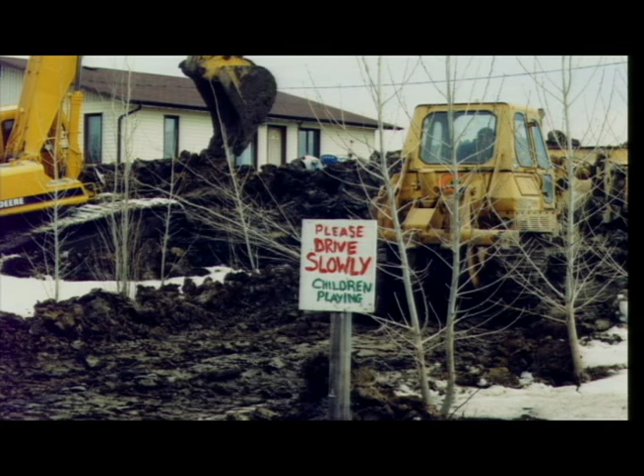So today I'm going to talk to you about the science of sandbags, specifically from an engineering perspective. Now, we've seen a lot of snow, and there's been a lot of reports recently about all the snow in southern Saskatchewan, western Manitoba, and certainly some further south, although not as much in the Red River Basin. When I see a picture like this, I have a very different perception than probably a lot of people do. People look at this and say, wow, it's a winter wonderland, good skiing, good winter activities. When I see this snowpack, though, I see what is going to turn to water in the spring. And that means this type of activity for me. This is a picture of some heavy equipment out building a clay dike, which is considered the gold standard for flood protection when you're looking at building dike structures for protecting homes, communities, and so on.

And so what you see here is basically, and I love this photo because of the sign, you see engineers out instructing contractors to build these structures to protect this home and what is a series of homes in a community here in Manitoba. Now, there are a lot of areas where we don't have access or ability to build these types of clay dike structures, so we have to turn to other forms of flood protection, and most notably the one in Manitoba that we certainly are aware of is sandbag dikes.

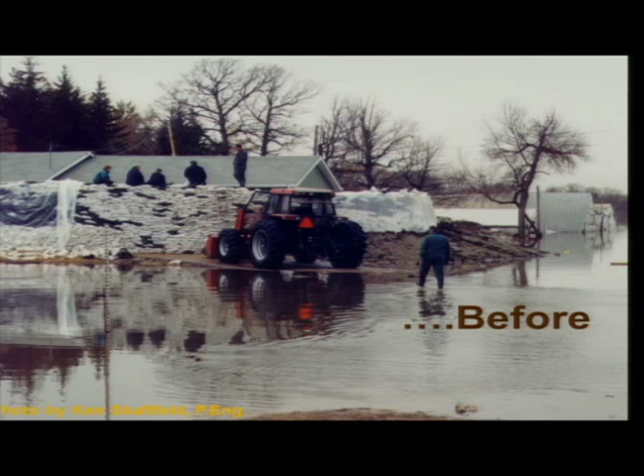This is a picture from 1997 of a house south of the perimeter where we're seeing here, and for those of you that are familiar with farm equipment will know, is about 10, 12 feet tall. We're looking at a 12-foot sandbag dike structure protecting this home. And we're very unique in Manitoba. This is very unusual to use sandbags to this height.

And when we did some study in my research group originally looking at this, what we discovered is sandbags are used for flood protection here in Manitoba, not based on a series of studies and tests and understanding of the mechanics of how these things perform, but based mostly on folklore, passed on through generations of people fighting floods over the centuries. And so as a result here, we can see this sandbag dike in 97, because that was the highest flood protection level we'd seen on the Red River up until that point since the construction of the floodway, was an extremely large sandbag dike.

And a lot of the engineers were looking at this and saying, well, wait a second here, is this thing safe? Obviously, we had to evacuate these homes. People couldn't live behind that structure. But there was a lot of uncertainty about whether it was appropriate to use the template for design for sandbag dikes that were typically 3-4 feet high, extrapolate that out to 12 feet in height. So right away, we saw the practice of engineering, an understanding of uncertainty of whether or not this was safe.

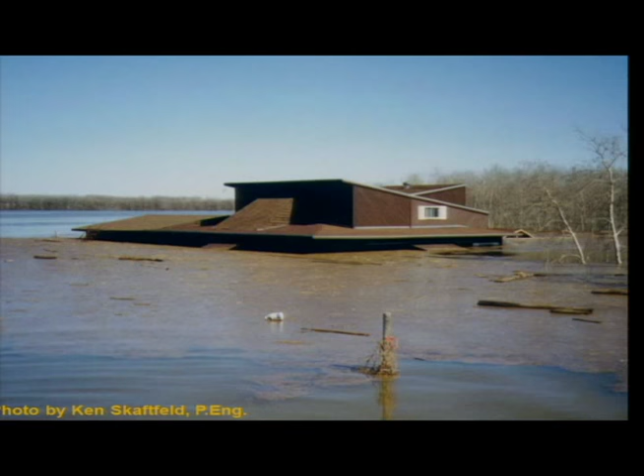We were very fortunate. We were able to save a lot of homes with sandbag dikes. But of course, that wasn't every single case. We had some successes such as this one. And we had some failures such as this one. And you can imagine the devastation and the emotional impact of having your home flooded to this degree. That's practically the entire main floor of that dwelling. So clearly there was a need to put some better science behind our understanding and look at other methods to protect homes during these types of flood conditions.

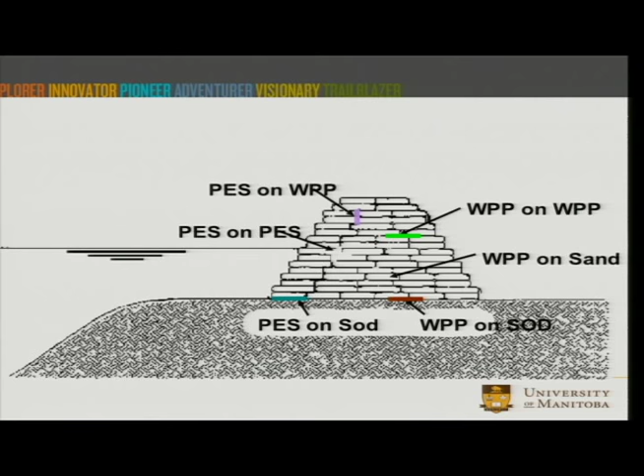Now I'm not going to go into the details of all these acronyms, but you can see here this is the standard template that's used. So when people are building a sandbag dike, this is the template that's given to them, and then some information about the height, the width, the top, and so on. But the key thing that I want to share with you is that a sandbag dike is basically a series of a whole bunch of blocks that have interfaces upon which they're sitting and have the ability to slip or slide, right? So the key thing is, when we look at how could this sandbag dike fail under hydraulic loading, the first thing we ask ourselves is, where might the slippage occur?

Is the weakest between bag to bag? There's the poly sheet that goes up this side. That's the piece of clear poly that you buy that you put into the sandbag dike to stop the water. There's the slippage on the sod itself. A whole bunch of interfaces where sliding can occur that could cause that dike to move and fail. And so right away we can see a research exercise where we have an observation that these dikes are stable up to a certain point, and we have an observation that it's this interface friction that's holding this whole thing together, these different interfaces. So the hypothesis is, if we establish or measure those interface strengths, can we then look at what is the maximum height we can design safely?

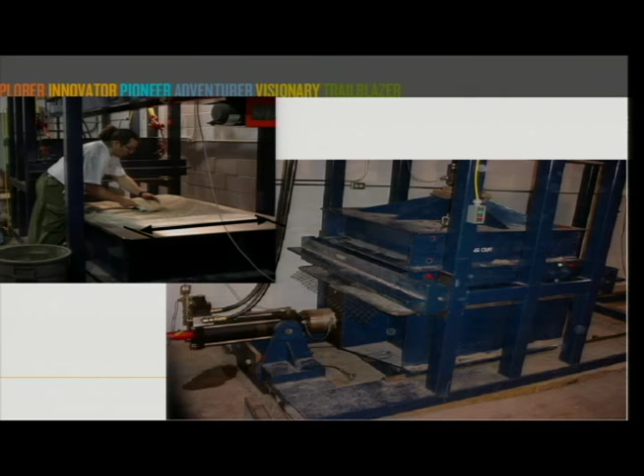And then you find out what the force is for the frictional resistance along those interfaces and measure them directly to use in mathematical calculations to establish the safety of these structures. So you can see here we put bags right inside the box, put it on top of sod, typical Manitoba, and then we shear it back and forth to get those strengths.

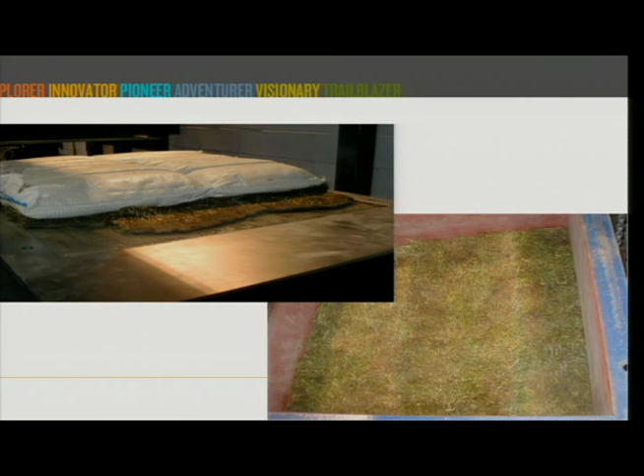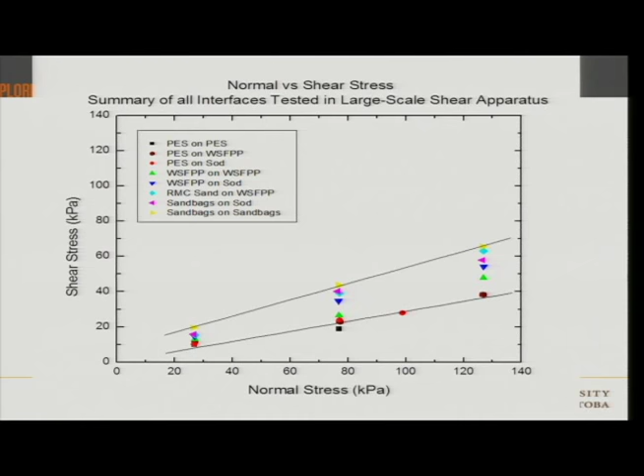I'm not going to go into details, but you can get a sense from the physics and math that using that information, we can now create mathematical models that allow us to calculate what would the failure surface look like in a dike if we reached the maximum load.

From a scientific standpoint now, we've got a lot of physics in this, we've got a lot of mathematics, but we're engineers. And in engineering, we're not going to believe simply the calculations, what we do in the lab. If we want to really believe something, we're going to go build it and break it. And that way we know that we've actually reached catastrophic failure. So what we did then is we went out and built 8-foot dikes.

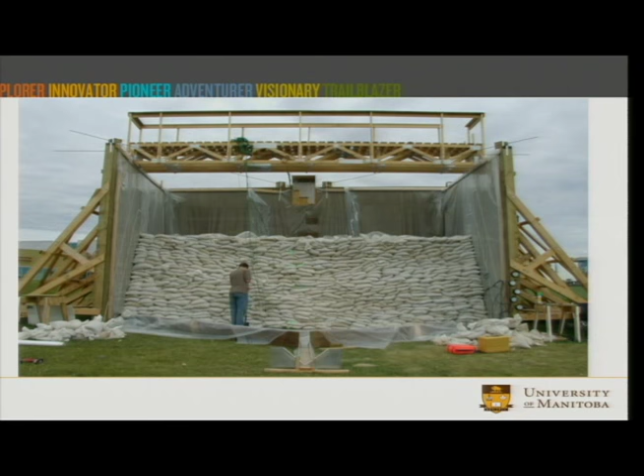We went out to the field, built that structure, so we could build an isolated segment of dike right in the field. And all those instruments that we put in there, you can see are all wired up here, all coming up, and they're going inside that dike. And what that does is allows us to then load this dike up with water in behind, and we can measure what that dike is feeling as that test is progressing to validate what our mathematics and physics have told us is in fact correct.

I'm going to show you a little video, and I think we've got the sound off because this was taken by a few of my graduate students, and there's a little bit of unfavorable language at one point because they got rather excited when the thing failed. But what you can see here is this is the dike. We've got a little bit of movement the video is focusing on at a couple of points, but basically it'll shift over to the center, which is what I want to focus on.

And so what you're going to see now with this video is we're getting significant amounts of seepage. You'll see the water level back here is getting very close to peak level. This is an 8-foot structure. You can see here, these are the leads for the instruments coming out, and what we're seeing is a lot of dirty water inside here.

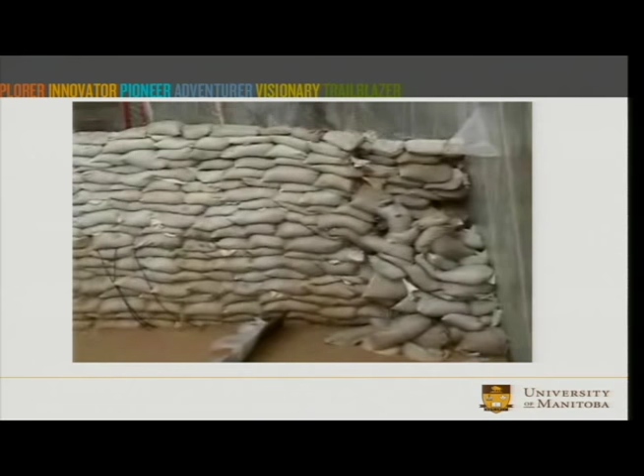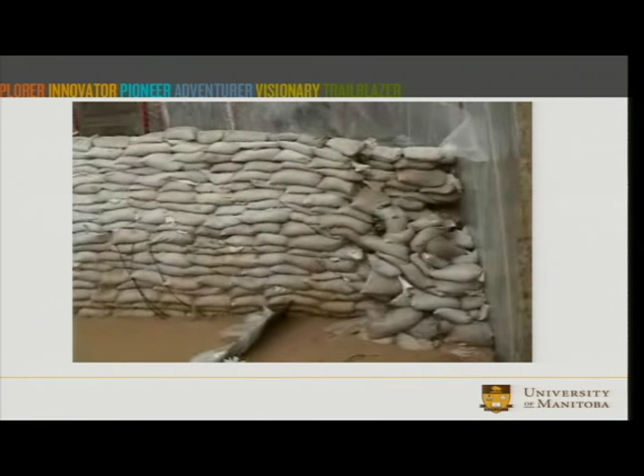What we're measuring is actually as that water is flowing through the dike, because these bags are just weaved polymer materials, they're actually porous, and the sand inside is porous as well, so we're getting water flowing through that's dirty, which is basically the loss of the clay fraction, or the very small particles are actually mobilizing and flowing out of the bags themselves. But the key thing we're focusing on here is the water coming out.

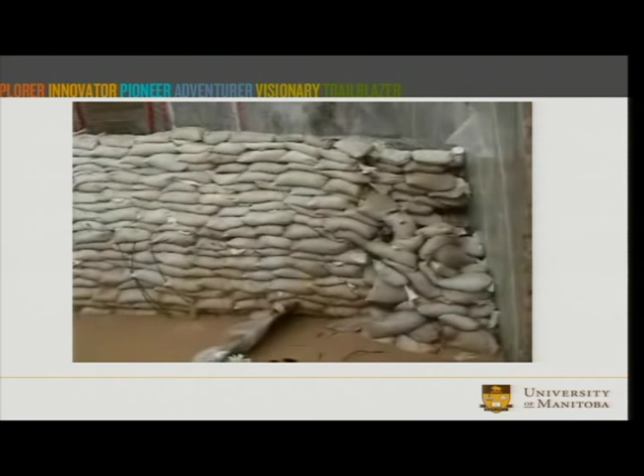We're seeing small movements. They're hard to pick up from the camera, but you can see more water coming out starting, and eventually here, we're going to start to focus in on this area, and you'll see some movements as we're leading to failure. Of course, only in Manitoba do you get a mosquito landing on your lens during your testing. So here we go.

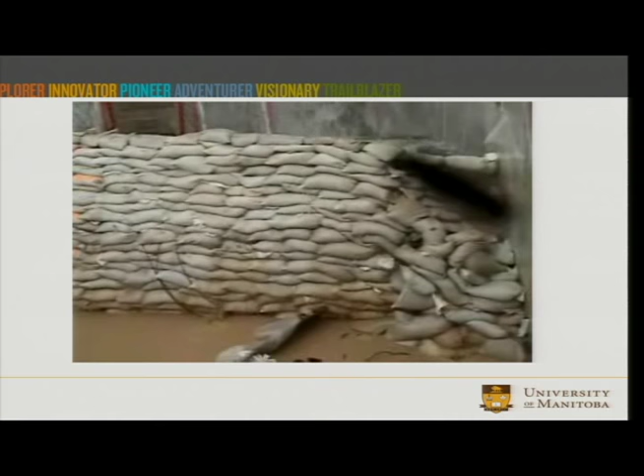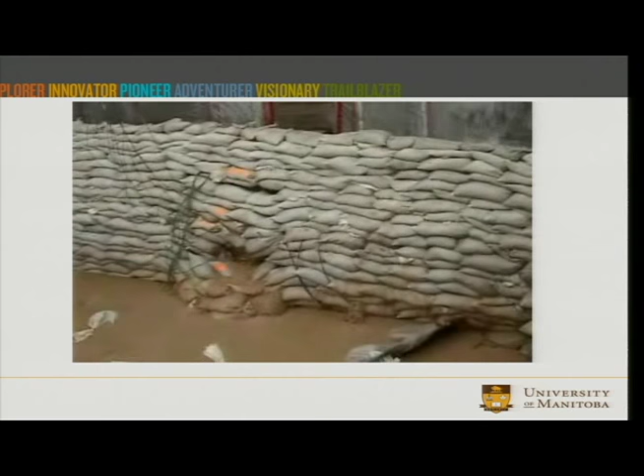We're moving. He's actually covering up what's happening on the one side. That there is the first slippage. We're seeing bag-to-bag slippage. We're seeing more water now, which is lubricating the interface the failure is happening on. All these instruments are telling us the water level pressure is rising, rising, rising inside, and we're seeing now the whole thing leading to catastrophic failure.

This end gives way, and then the entire structure starts to collapse. And so for the first time, we have measured evidence of the collapse of a sandbag structure with all the instrumentation telling us exactly what it's feeling and how the water pressure is driving that failure.

That was pretty exciting. The results of that validated what the physics and math were telling us, and we've now been able to introduce that into policy and planning so that there are now limitations. The dikes can only be built to 5 feet high using the standard template, after which a professional engineer is required on site to validate some changes to the geometry to ensure stability over the 5-foot height.

And so we're seeing research now directly making its way into engineering practice and obviously into an area of considerable importance to protecting communities and citizens in Manitoba. My research group now is doing a lot of work looking forward to new materials and new products, better ways of building flood protection structures. And we're looking here, these are some Hesco structures.

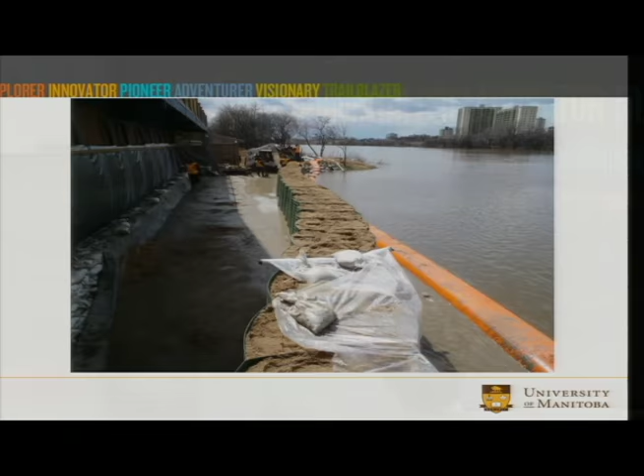Was anyone involved in throwing sandbags in the flood in 2011 in western Manitoba along the Souris, or anybody? There, we got a couple of people. You might have seen some of these Hesco barriers. They were deployed in a few places, including along the number 1 highway near the Sandhills there. What's the park? Camp Hughes. And so we're seeing some of these new materials now being brought out, and so we're doing a lot of testing on those to validate their benefits over the sandbag dikes.

Similarly, we've got these tube products, another type of product. But the point being, we're looking at all sorts of new options that can be used for flood protection, because the sandbag dikes have a lot of limitations. And although they've been used for some time and they still provide tremendous value and people trust them, there's a lot of opportunity for new types of products that can be deployed much more rapidly, require less resources, can be done more quickly, and they provide a lot more benefit in terms of rolling out flood protection very quickly, certainly in urban areas.

So I hope that gives you a sense of what, this is just one area of engineering, but the point being that we apply the scientific method in all of our work to understand how the science behind materials and infrastructure is absolutely critical to understanding the limitations that those materials and infrastructure can withstand. And then we look at testing that in an environment where we can actually push it to its limits, and then as a result understand behavior.